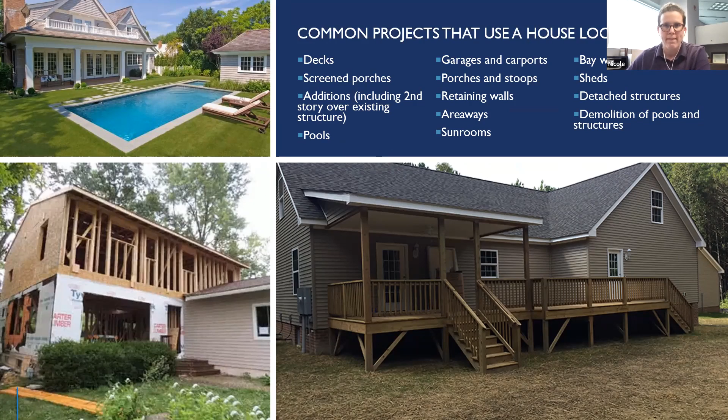So again, house location plat - I just have this slide here to make sure we're all on the same page about what a house location plat is, since this is what's required to perform these site permit reviews. On our website, we have some information about the minimum requirements for house location plats, and we've got some links down here so you guys can look in more depth at those requirements. But generally, it needs to be clear and legible, show the entire parcel, be signed and sealed by a land surveyor, have a scale listed, and must show the existing and proposed work on the house location plat.

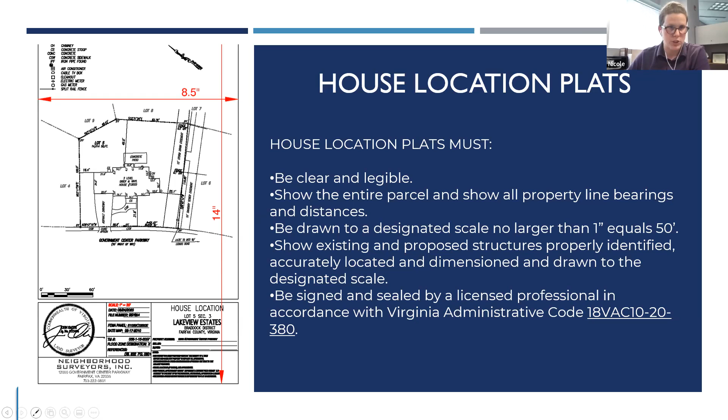So going into the 2,500 square feet, that is the limit of disturbance we're looking for. These are the things that contribute to that 2,500 limit: it's the area of the footprint for the project itself, so if you're doing a deck, it would be the footprint of the deck - if you're building a 10 by 10 deck, that's what we're looking for. Then there's a 10-foot work zone around the proposed work, so with that 10 by 10 deck you're putting a 10-foot buffer around it, with the idea that you're working within that space to build the proposed structure.

There's also possible area for a stockpile - stockpile for us is anytime you have to excavate dirt. It's not necessarily there for material storage, but anytime you have to excavate dirt and put that somewhere on the ground, that's what we're talking about with the stockpile. And then a 10-foot wide access from the street to the area of work. Most people are able to leverage their existing driveway to start that access point, and that tends to be where we go from the edge of the driveway to the proposed work - for example, if it was a deck, going around the house to the rear from the closest part of the driveway.

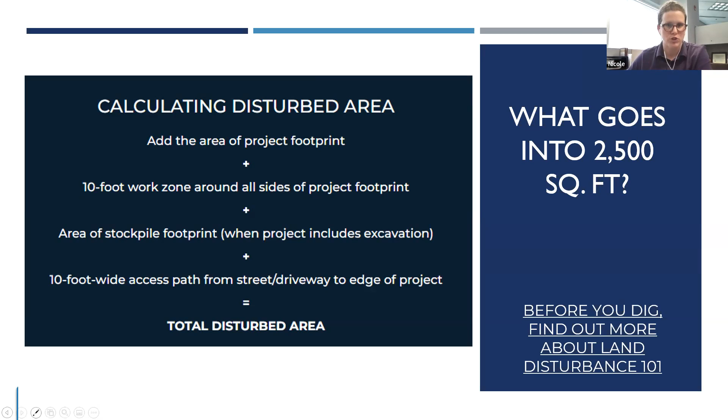So here's an example of how we calculate that. Both the information before and this one are all available on our website. This outlines what we're showing here. In this case, you've got a driveway and a proposed detached structure. We'll assume for this example that it's not a garage, maybe just a rear addition or a pool house, perhaps there's a pool over here. So you have a 10-foot access going there, and that 10-foot buffer or work zone all the way around the structure, and then the structure itself would be calculated.

Do you want to see people put dimensions on the drawing to tell you how big these areas are, or are you just going to figure that out from the plans for that structure? So we do figure it out based on the structure. It is certainly recommended and encouraged for you guys to put that on there for us. It gives a good example and a good way for both of us to know where you're planning to access the work zone, and it also shows that you're calculating that.

If we get a discrepancy somehow, it should be an easier discussion about how we're having a discrepancy. Generally, if there's a discrepancy and you guys are showing your limits of disturbance, it generally comes down to maybe you called it an 8-foot work zone, but we said it has to be a 10-foot work zone. Things like that tend to be where we get that discrepancy, but that generates a good conversation for us to be able to have.

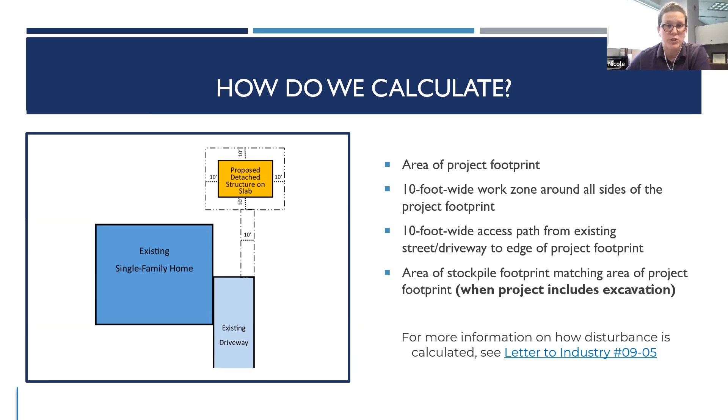The next couple slides are just examples. So, looking at this plat here, this particular person did not show limits of disturbance. For these more complex additions, if it's not super easy, we occasionally have to print it out and draw it on there, and figure it out so that we're all on the same page, so that when we discuss the limits, we're all seeing the same thing and can have that conversation together.

So in this one, the yellow is that work zone. All of this hatching is new additions being installed. We have the driveway here, that's why the yellow just stops. There's no stockpile necessarily having to be proposed in this one, based on looking at elevation pages and things like that.

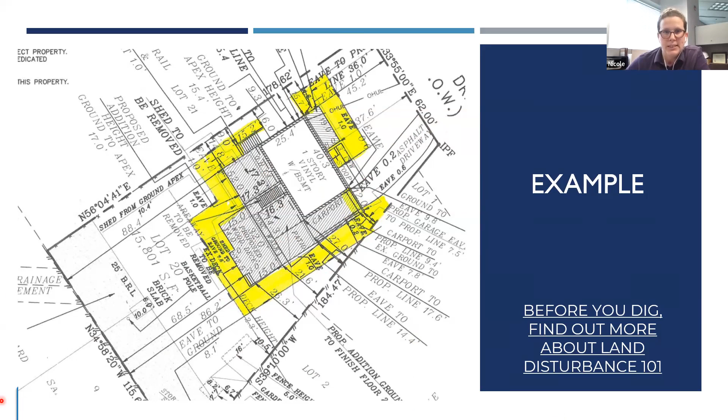This one is a good one, right? They actually did outline and show us their limits of disturbance. They did a few things that we would have done differently. I know some local jurisdictions allow the corners to be cut, but it's not something we do in Fairfax County. So they're cutting the corners here, but this particular person bumped out for this bay window. We would have let that remain within that 10-foot access.

So this red is what they calculated. This light blue is what we calculated using the measuring tool within ProjectDox. This is how we measure LODs. You guys have access to the measure tool from your side of ProjectDox as well, and this is how we get to it. We reduced any existing impervious area, and that's how we got that this one does remain under 2,500, including a stockpile that they did not show because this addition included about 3 feet of excavation.

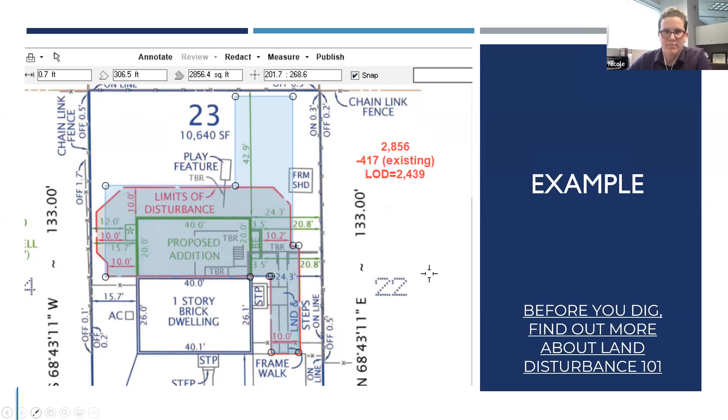Again, just another example of lots of work happening here. They showed limits of disturbance, but it wasn't quite lining up with how we would have done it. If this existing deck is to remain, then you can't tell me that you're going to drive the machinery over that existing deck as part of your work zone. So we do account for that sort of thing as well. We're welcome to have those conversations, but it does need to be a realistic approach to the construction.

Again, if you're going to tell us that the deck's to remain, then to get to the other portion of the work, there's an assumption you're going to have to go around it. Especially in this particular case, it only allowed for 3 feet. They were going to cut the existing deck to build this addition. So things that didn't factor in a stockpile, we had to add a stockpile. This was a dig out for a basement. That's how we come up with it.

We try to list out our calculations, especially when it's very close, so that there has to be a conversation about how we got there, why we got there, and what we saw differently. It's just a little easier to show it when we do it this way.

Any questions on those examples? When you go over, as they did in this example, what happens? Do you reject the submission and wait for it to get revised?

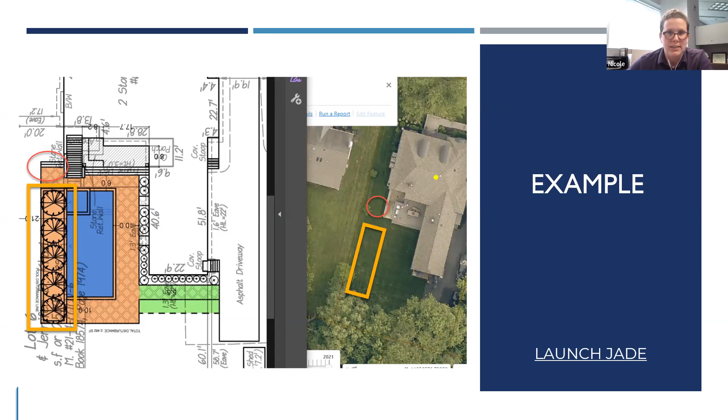So again, we're just trying to look at the whole thing, make sure that everything matches up with what you're giving us, matching up with what we're seeing out there, and ensuring we're all on the same page. But again, this is all available to you guys as well. That was kind of the quick rundown. If you guys have any questions, I'm happy to answer them.

Are you going to go into what a grading plan is? I was not, that's not part of this topic. No, I think it'd certainly be a good topic for another day. That's a separate department. We work closely together, but my group does not go into the grading plans and the requirements for the grading plan, so I would probably do a disservice trying to explain those or answer any real technical questions on it.

Is it something that has to be done by a licensed person? The grading plan submissions, yeah. Yes, I do know that, but yes.

Like in one of those examples that exceeded the limits, if you could back up a little bit to that 2,900 square foot one. They exceeded your limits of disturbance, but it doesn't really look like they're doing any grading other than digging the holes for the foundation here. So would you still require the grading plan, huh?

In this case, yeah. There was enough here that, in addition with the stockpile, giving back all of the impervious that we could. So as you see, they're building out this addition here. We gave them back the existing driveway footprint. This was all brand new, including the dig out for the basement. So this section here, they called a basement. It's a new laundry room.

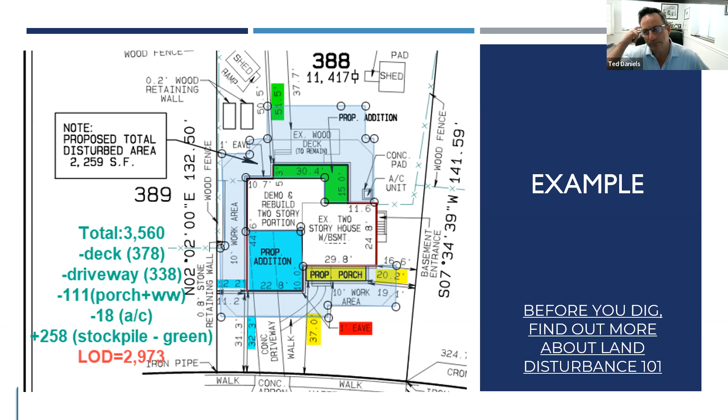So who's leading that one, Helman? That's going to be me. It's gonna be Steve. Okay. Yep, thank you, great, sure. And I apologize, I don't know how to— oh, there it is. Thank you, Nicole. Yeah, thanks, you did great, Nicole. Thank you, good job.

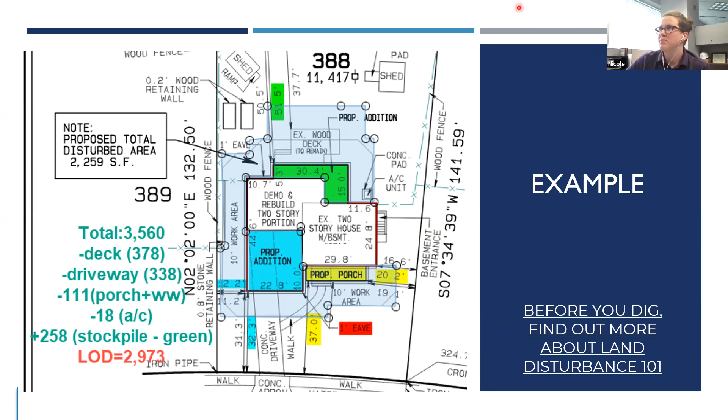Good afternoon, Steve Kendrick, the current manager of the Permit Application Center. This afternoon, I just wanted to give you a high-level timeline on Plus, which is our new software that's going to launch later this year. It's the planning and land use system that we have dubbed Plus.

We've already had 3 releases of this software. Various things are out there on the street to be done now. There's some site address change things, there's a lot of zoning stuff that's available. We have a few things on the building side—code modifications, code appeals, and household appliance applications—and permits can be obtained right now currently through Plus. There's a much larger launch coming later this year, and we're just going to go through our tentative schedule right now.

That starts on July 12th. That's when the development period ends. So all the things that we're building, from workflow to fees to inspections, the types of applications that you're going to apply for, July 12th is the last day that we will be doing that development work.